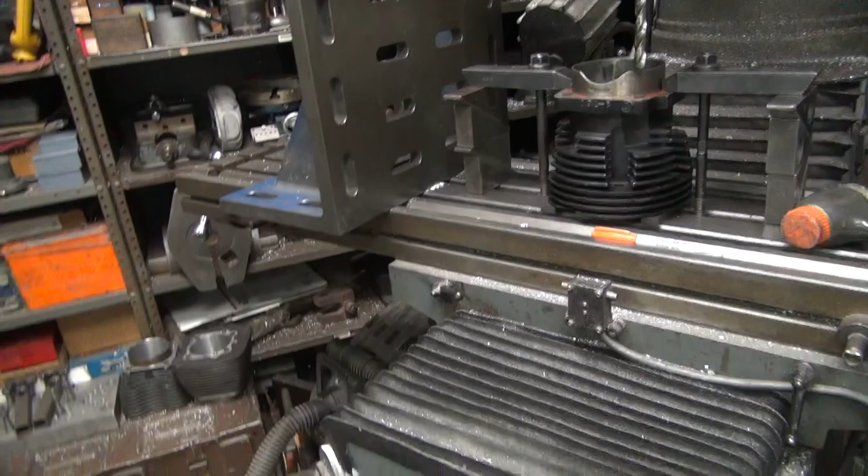Okay, back to another late night go at this again. So I stayed here last night till about 3:30 a.m. to get this cylinder kind of roughed in square. Figuring out the hole location by dropping this drill bit back and forth here like this till you find the center point and keeping track up there what we were doing.

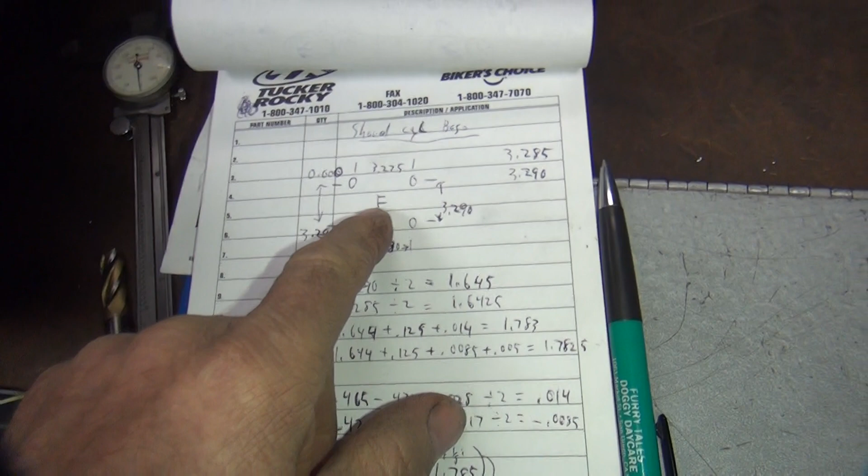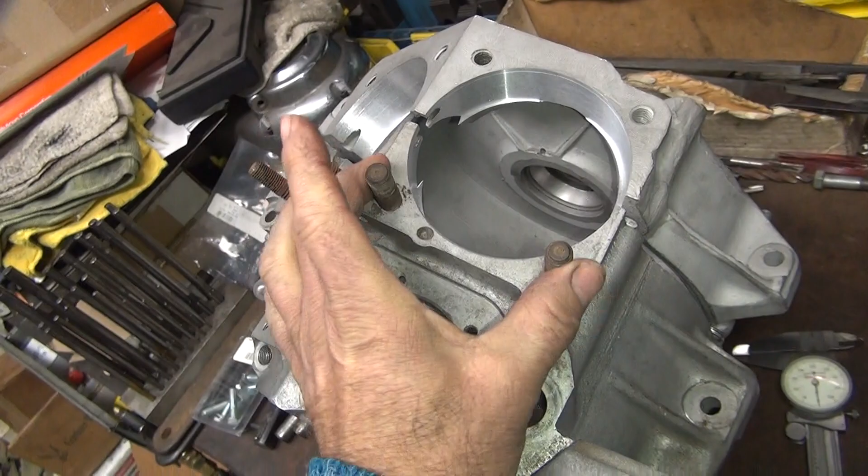So basically, I came up with the numbers here. We had 3290 going front to back, which would be the distance from these studs right here. So that'll be the center line dimension. And then the side to side dimension this way I had 3275 and 3280. So I had a variable of 5 thou that way, but it was 10 thou. We got 10 and 15 thou in their numbers.

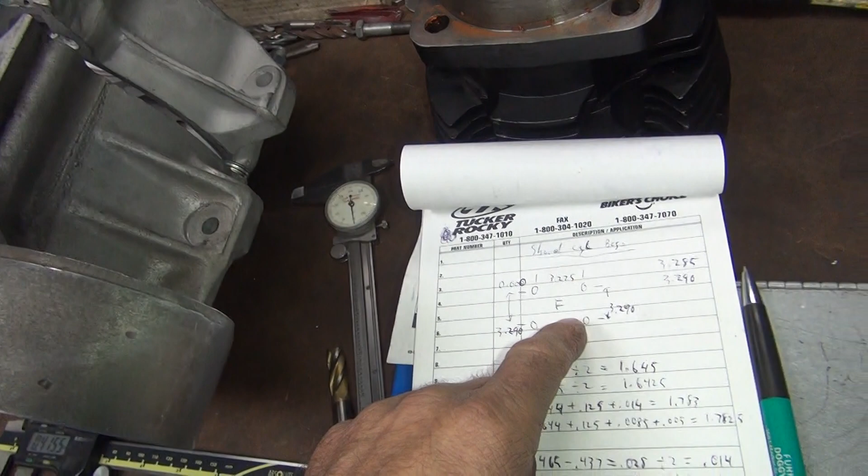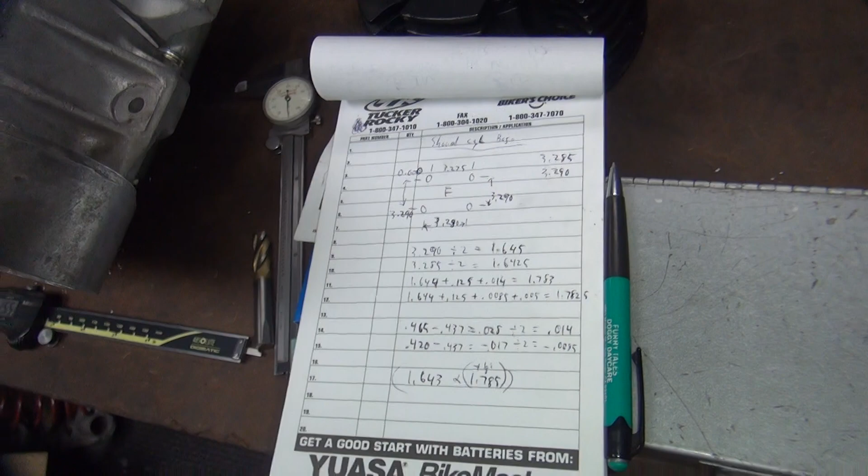So this looks like a square bolt pattern stock. You know what's on the cylinder right here, it's square. I went and measured a '61 case in back I was working on, and it's a square pattern within 5 thou. So the basic dimensions are either 3290 or 3285 is what the center lines are between this way and this way on the stock cylinder.

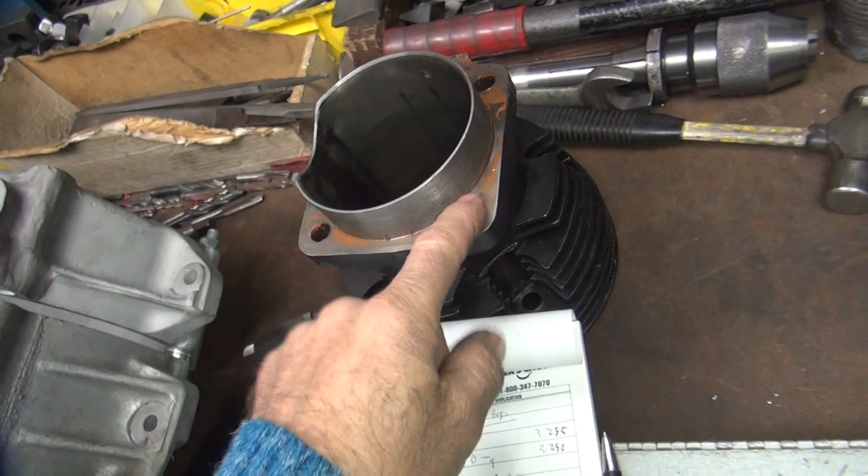That'd be both directions. So if you started here and went 3.285 that way, you'd be in the center of that hole. You went this way, you'd be in the center of that hole. You went that on both directions, you'd be on this one. So that's called dimensional figuring. You start at a common point and work to each hole. I want to add 1/8 of an inch on each side of the hole here for the spread distance this way, but stock dimension this way.

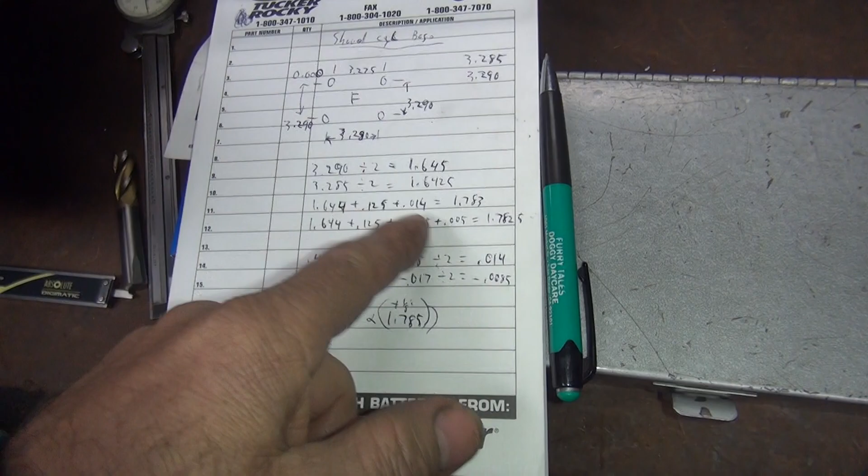The other way of calculating stuff is the center line dimensions, where you come from the center of the cylinder and you go out, and that spreads out equally. So I like that dimension better because it's easier to keep track of where you're at. When you add 1/8 inch, you get kind of confused on where you're at. So what I came up with was a bunch of calculations going by the smaller cutter size that I have here, the oversized hole here, and the standard stud size here. I worked everything all out with all the math.

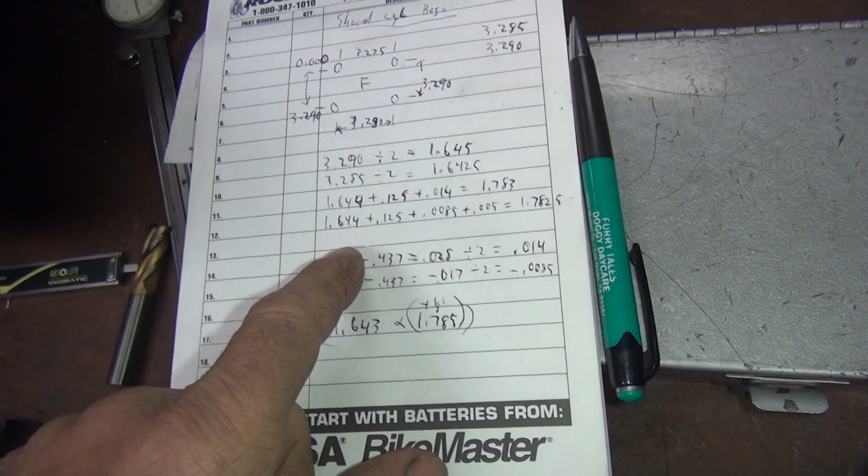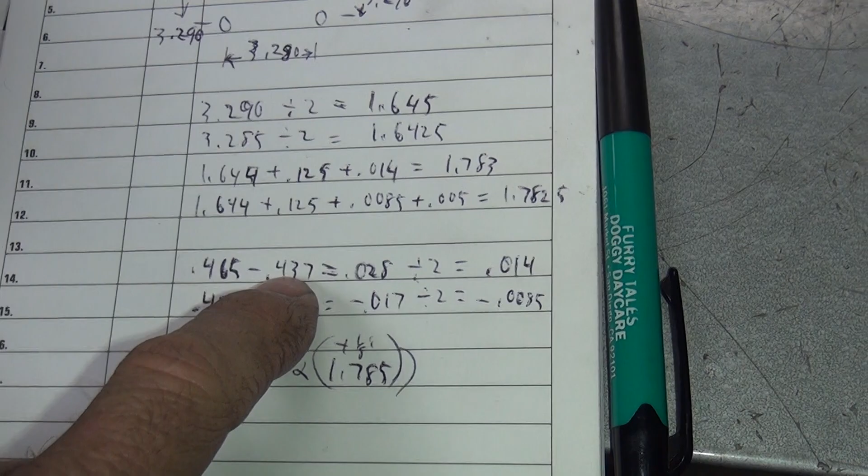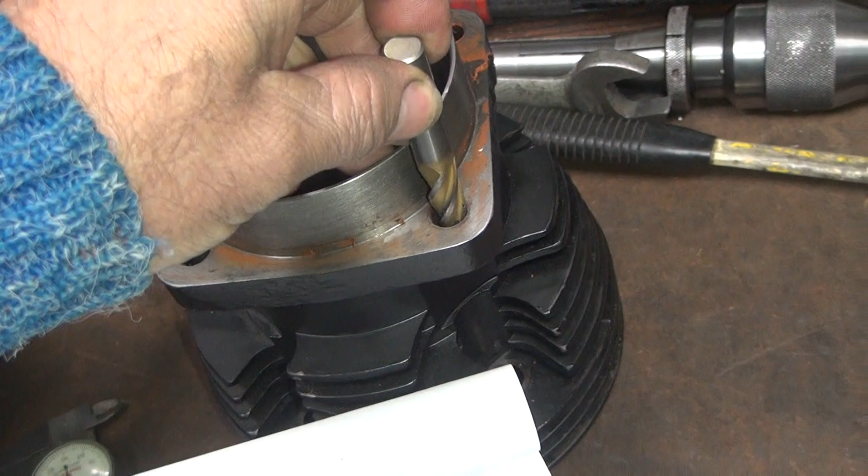So basically, if I average these two numbers out, I get 1.644 for half my center line dimensions. So that's going each way. Because you took the big number, divided it by 2, that gets you the center line. So doing that, I came up with that. The hole that was in here is pretty big. So it's 465. It should be a 7/16 stud, which is what that is. So it's 28 thou oversized. So that's a 14 thou offset to get your cutter from the center line over to the edge of the hole, because we've slotted out. So that's what that worked out to be.

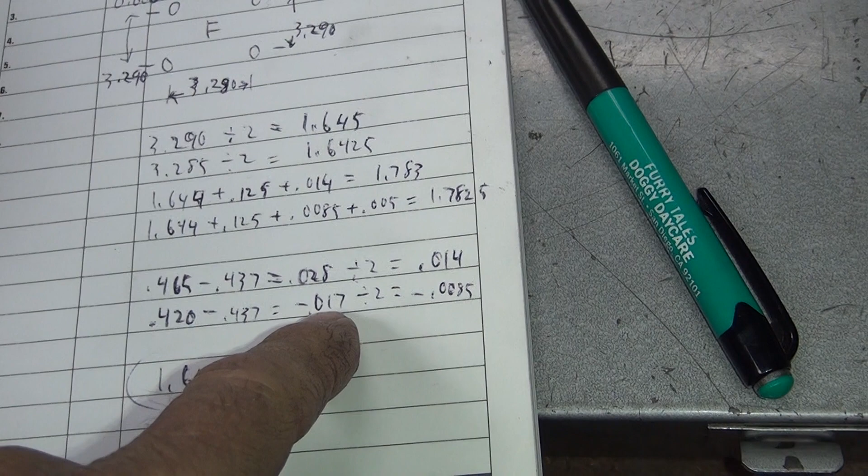Now my cutter is undersized. So it's 420 instead of being 437 in diameter. So that's a 17 thou offset, which is 8.5 on center. Smaller, so you got to add that onto the number. So if you take all those numbers, 644, 125 for half the case split here, because that's 1/8 inch from each side, 1/4 inch total. Then you have 8.5 offset for the cutter.

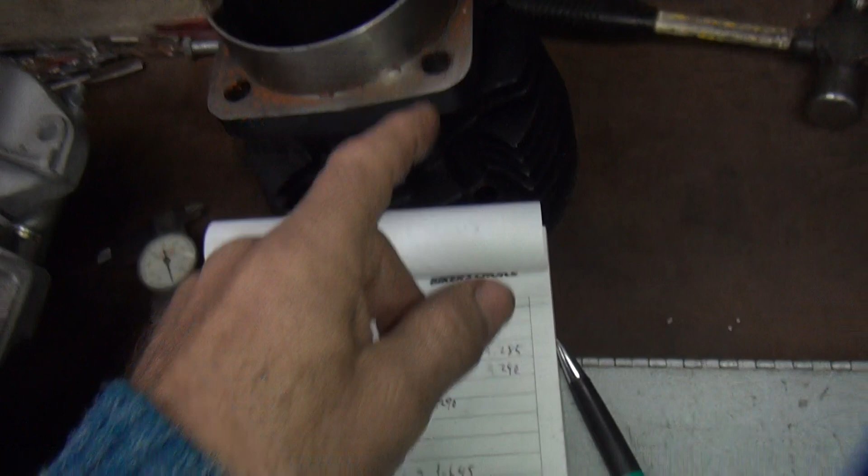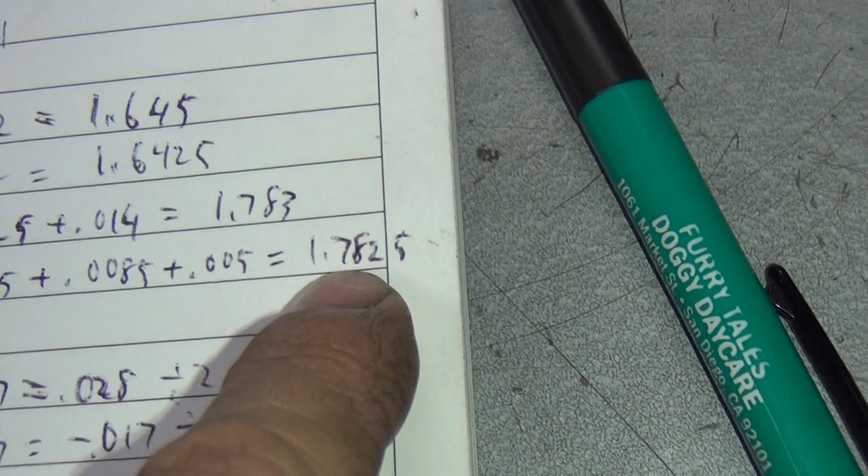And I add an extra 5 in there for clearance, because I don't think I need 30 thou slop in the damn hole. I'd rather have a little bit tighter fitting than one that goes clunk, clunk, clunk back and forth. Just a little bit of clearance is fine, but I don't want a lot. So I came up with a number of 1.782. So I'm just going to round it up to 785. And the 643 is the number that we can use, or 644, whichever one you want to use.

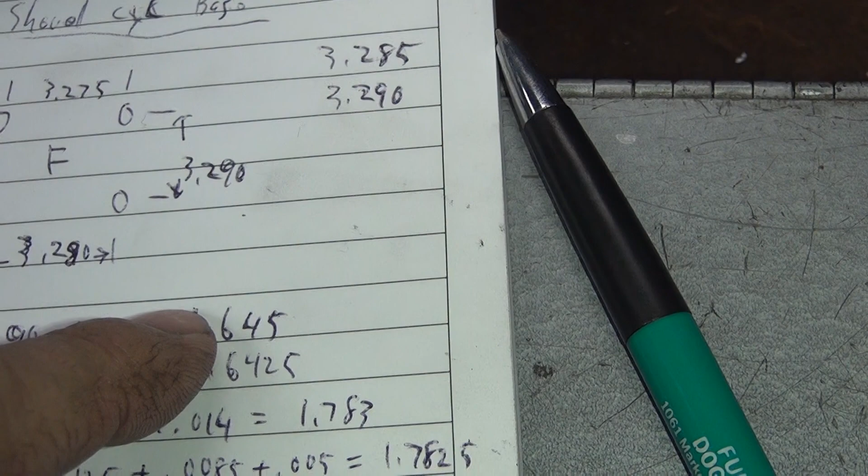So it's 42.5 to 44 to 45, I mean. So you can be anywhere in that group. We'll average out your two numbers. I'm a little bit tighter, so I'm trying to just keep things a little smaller. All right, but I can make that 44. Doesn't really matter. 1 thou ain't gonna kill us. That's 2 thou total, but whatever.

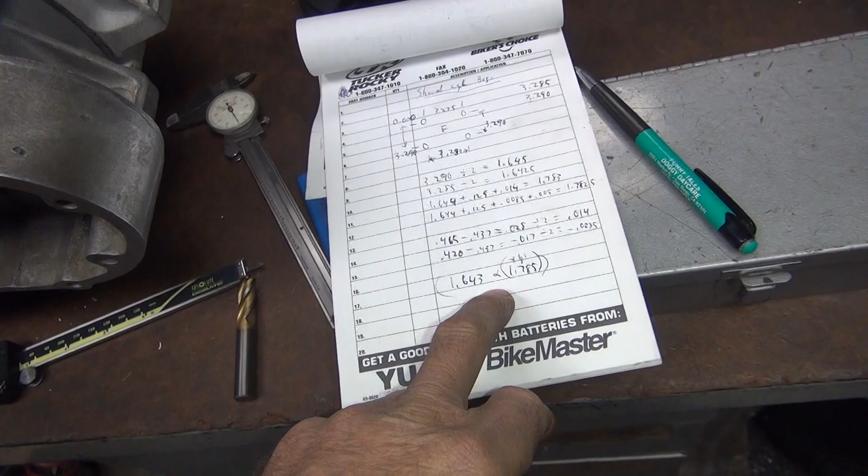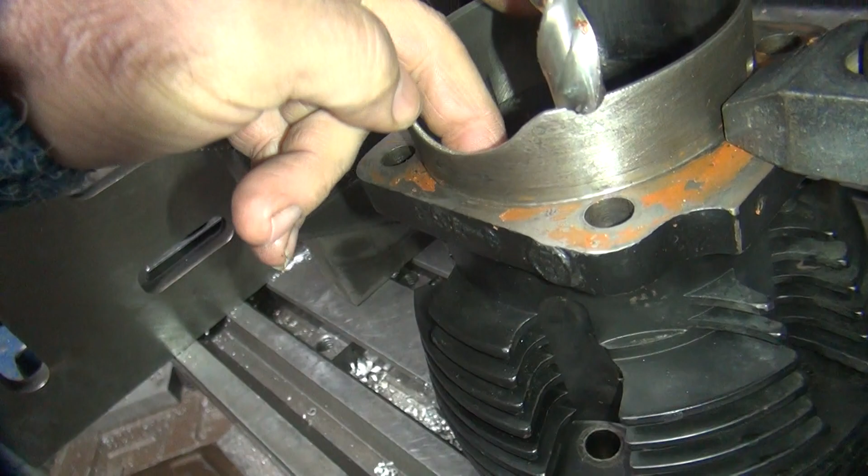So these numbers I got, those are gonna be the XY dimensions up here after I figure out what the center line of the cylinder is. Now I need to do this anyway because I need to bore out this cylinder where it's all been squeezed in right here. So I got to recut that with a mill to get that area cut out, and then I can hone it back around. So I need to get to the center of the cylinder anyway. So I'm going to use that dimensioning. There's lots of different ways of figuring stuff. That's how I'm going to do it.

If you had a CNC mill, you'd probably come off to dimensional measurement, not centerline dimensioning. Now, those might not be the right phrases, but that's the terminology I use because I know what it means to me. And that's all I really care about, so screw it.

Okay, so that comes out of the hole there. Back this over to the center. Now, theoretically, if you go 1.644 or 643, so 643.5 in the middle of those numbers. Six, 643. And then there's another half. 643, not 663, dumbass. Okay.

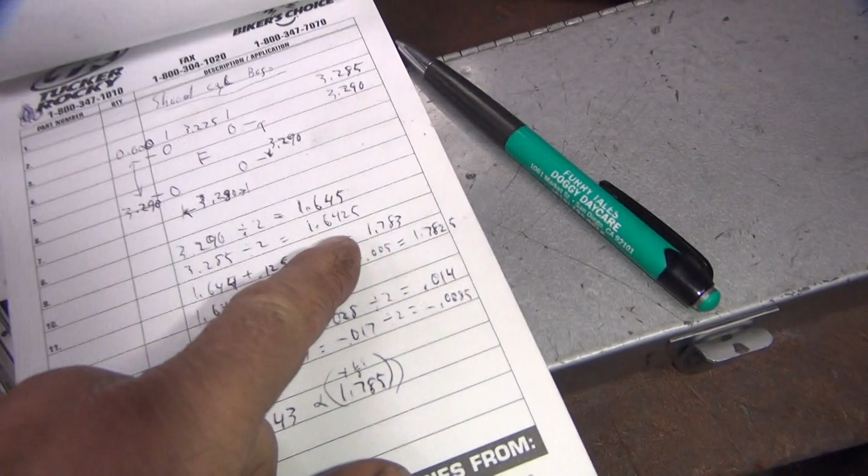So I took my dimensions that are guessing where I was at, right up there. We put my number in plus an extra half. That should give me a real average of these two numbers here. Because see, it was 642 to 645, so 643.5 should be in the middle of both those numbers. That would be called an average. Theoretically, I should be right on center now when I sweep this with my indicator. So we'll see how far off we are. If I'm within a thou or so, we're doing pretty good. If I'm more than a thou off, we're off. So let's see what we're gonna get.

I already see it's off. Okay, what do we got over that way? We're at 0 that way. Okay, we're good that way. This way, not so good. I was off in some dimension. Let's see, that's about 10, about 11 thou off. So you split that in half to get where we want to be. Of course, we got wear in the cylinder, doesn't help matters any. Go further down might help the situation a little bit. And that changes a bunch. One extreme to the other. 0, not quite 0.

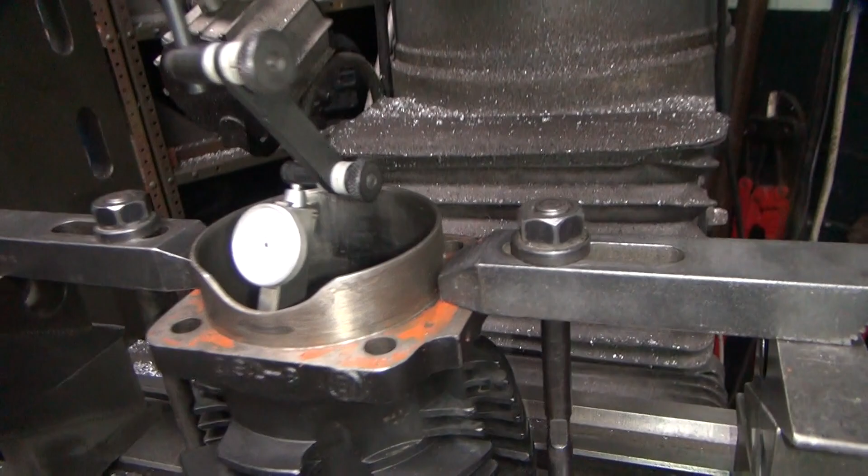Alright, cylinder's out of round, so we're not getting a perfectly centered up hole, but we're within a half a thou. So when you sweep it around, we're staying pretty even now. So there you go. So I can live with that.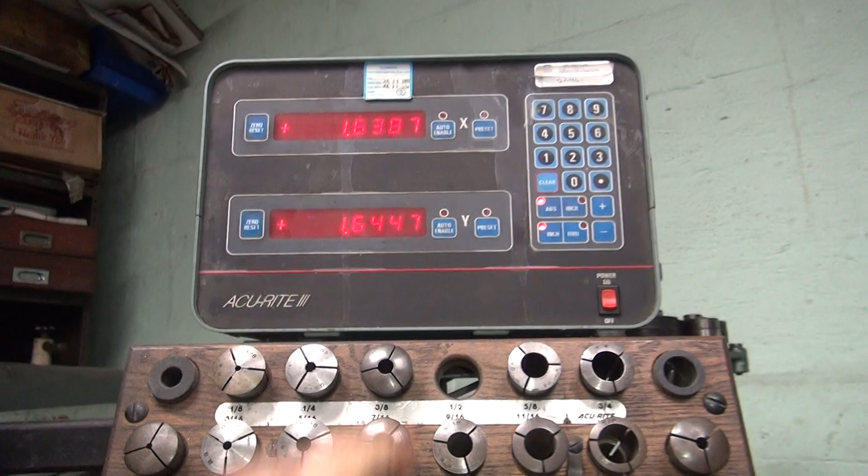Okay, so we wound up being 6447, which is on our number we wanted, and that one we're off by quite a bit. That's 6 thousandths off, which is our 11 off, 12 off. So I'm assuming that's because I had this 275 number and we got 290 over here. That's 15 thou difference, and we're showing 11 thou up here, so we're within that tolerance range. So that means my hole numbers are probably pretty close, but like I said, we're coming off of someone else's deal. Anyway, right now I'm going to go ahead and zero this thing out because I am on center now. Boom, boom.

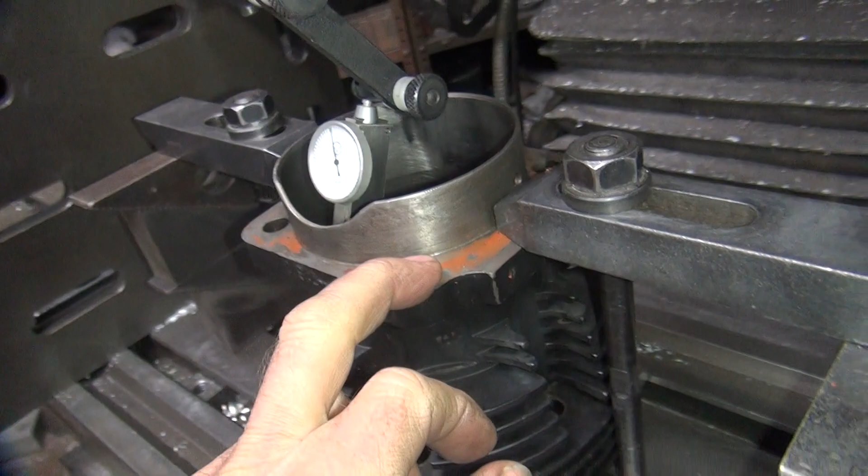So now I can go ahead and bore this thing on center to clean that up, and I can go ahead and move this off center and cut the holes bigger. So at least I got something to go by now. A lot of work for setup, and only takes a few minutes to do the cutting. That's normal. When I do the next one, I get to do the same thing all over again. Oh boy.

Okay, so now, take the indicator out. Let's see how close we were here. We got 2 thou of difference here, so the cylinder's probably not quite flat either, I'm guessing. Let's see, we are losing 2 thou. Go in this direction. Staying pretty straight on that side. Same on that.

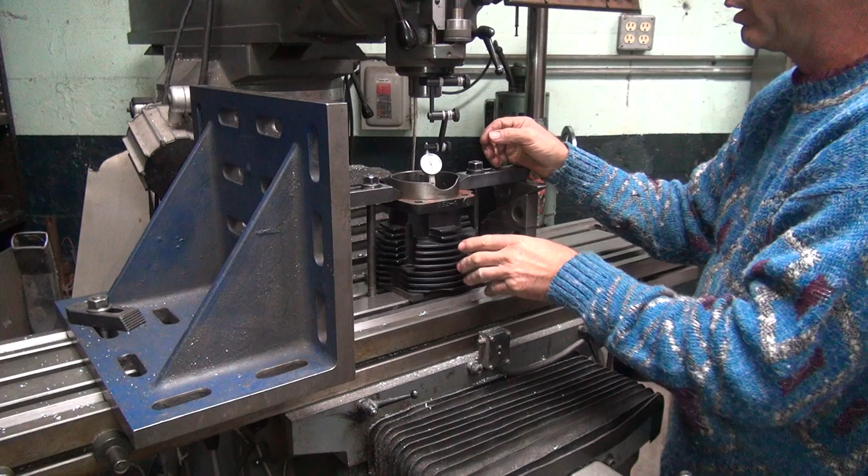So only this side has got a taper in it, and why has it got a taper in it? Because someone beat the hell out of it right here on the side, and it warped the whole cylinder on that side. Plus that is where it wears. That's the wearing point. It's the thrust side. So there's a lot of wear in this cylinder. What a shocker. Beat up race parts are not square. That is really hard to believe.

Okay. Alright, so I'm going to take my end mill. Try to leave out enough distance I can use it.

A little bit of wobble, but not too bad. Okay, so now we need to go figure out what direction we're going to go here. Okay, we are going to go this direction wider, stock this direction. So that means this one here we go to our 1643, 640, whoop, or 44, whatever you want to call it. Split the difference. 38. 643 and 8/10. That's pretty close.

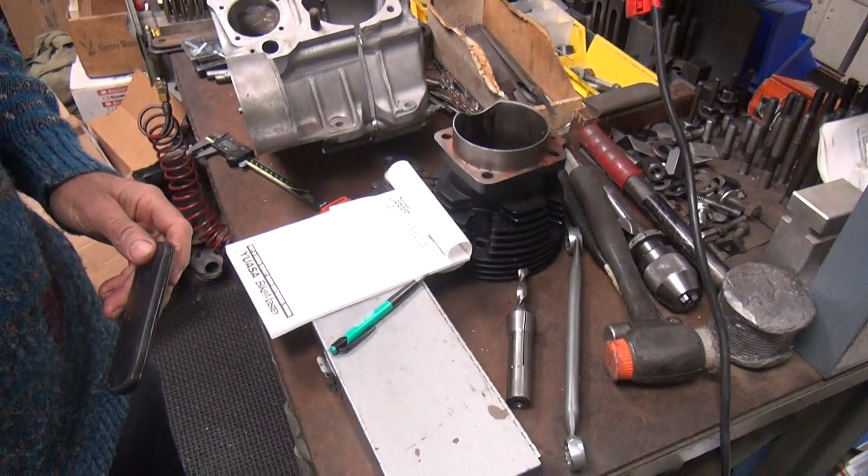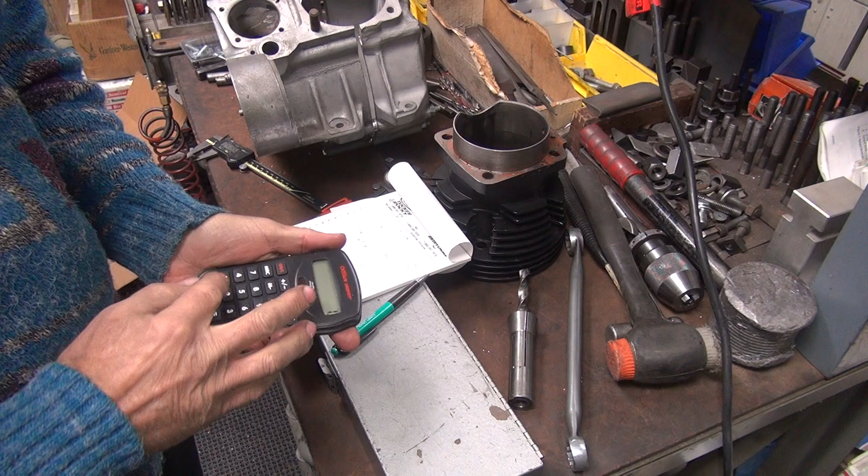Okay, now if I go this way, we have my calculator here. I gotta do a little test. So we're going to be adding 8.5 thou to our 14 thou here to our number there. So 1.644 plus 0.014 plus 0.09 equals 748, should be the edge of the hole.

Let's find out. 1.748. That doesn't make sense. That doesn't make sense at all. This number's too big. 0.748. No, that's not right. Right there we hit 668. I'm 100 off on something. So where did I come up with my error? Somewhere I got an error in there. Probably gonna be half the cutter. I'm doing something wrong with half the cutter probably.

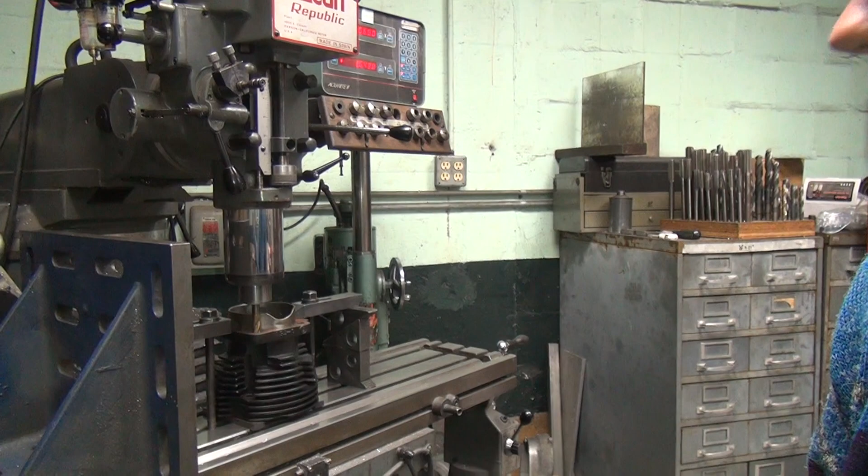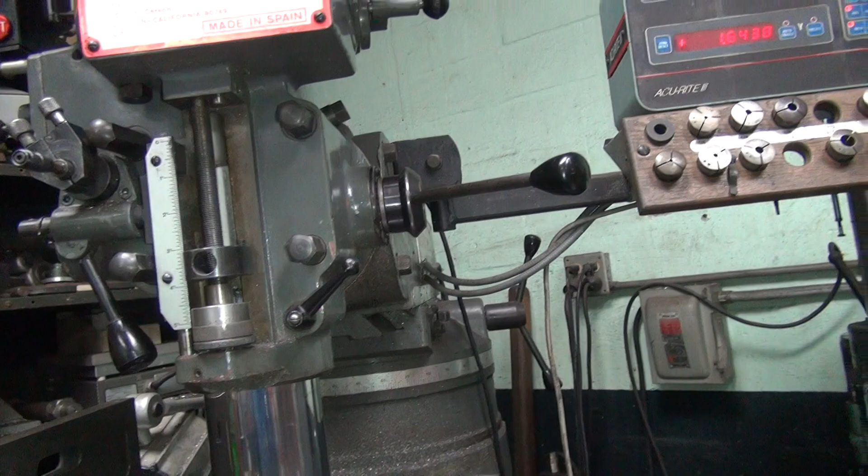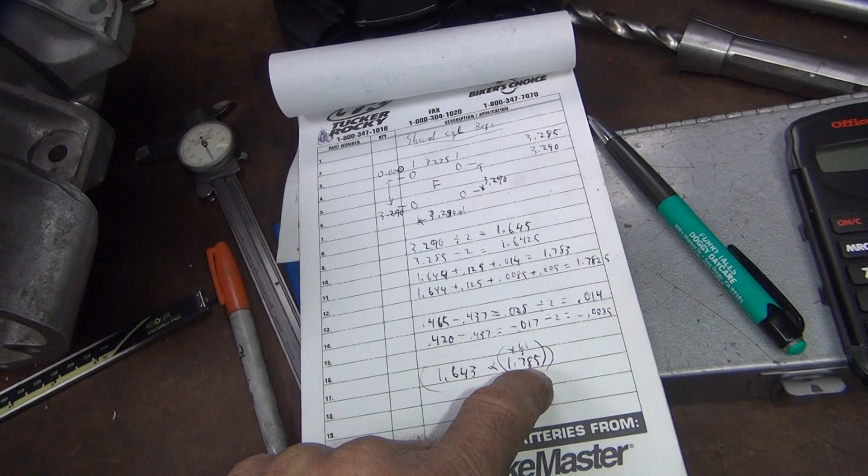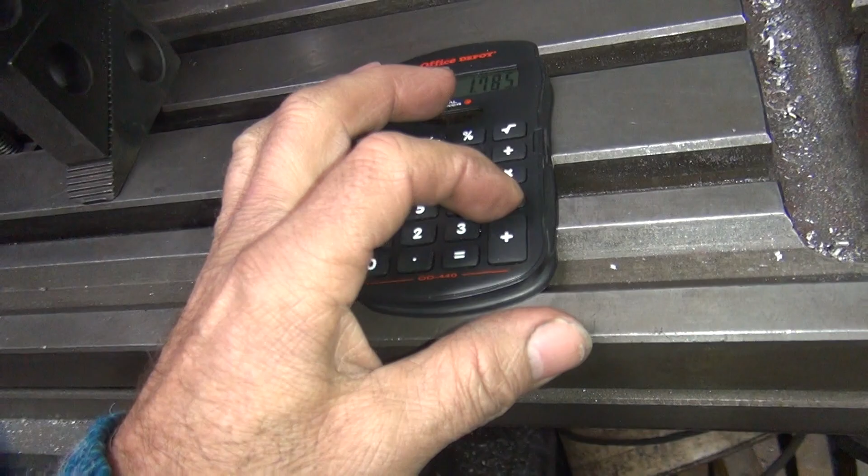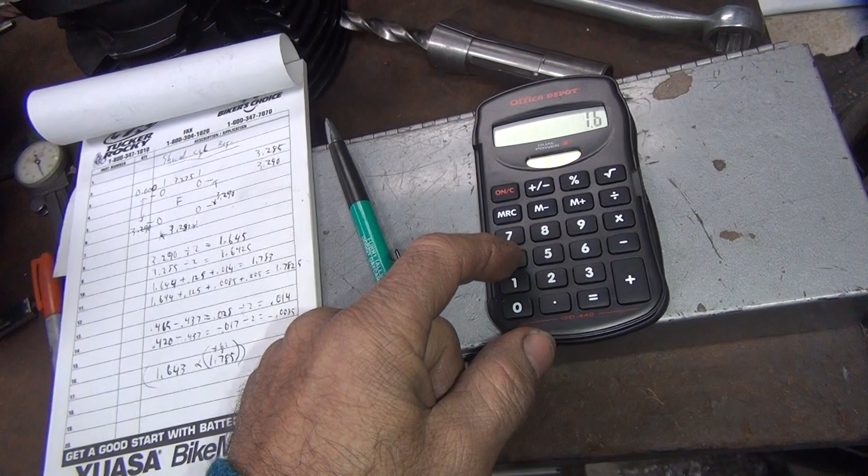So if we take our 1.785, that's the number we had right there, we minus the 643 number, 1.6, oh damn it, closer, 1.785 minus 1.6435 equals 141 and a half, 141.5. How am I coming up with these numbers? See what tired does for you? What the hell is that number?

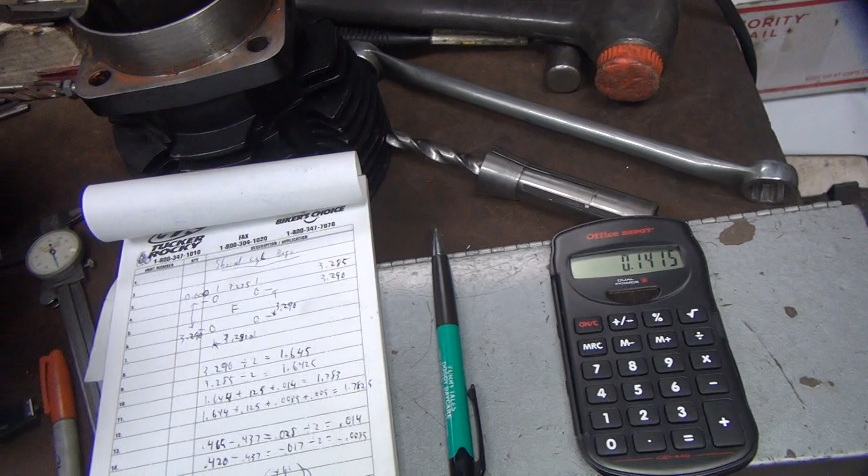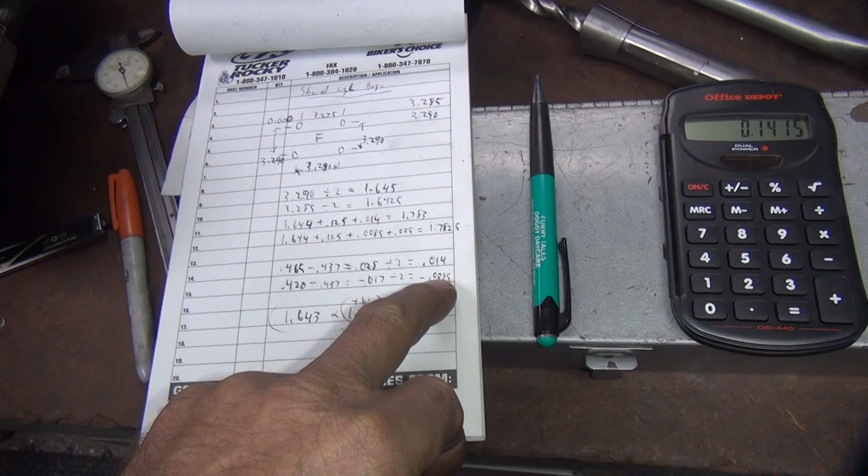That'd be 283. You double it. I don't know what that number is. Oh, the offset's the 1/8 of an inch. 125, but that's still too big for that. I have no idea what that is. So much for math helping me, right? Okay, well we know it's 668. I'm gonna go check this and see if it's 668. Somebody can go through all the dimensions and figure out where my error is at, because there's an error in there someplace. I don't know what it is.

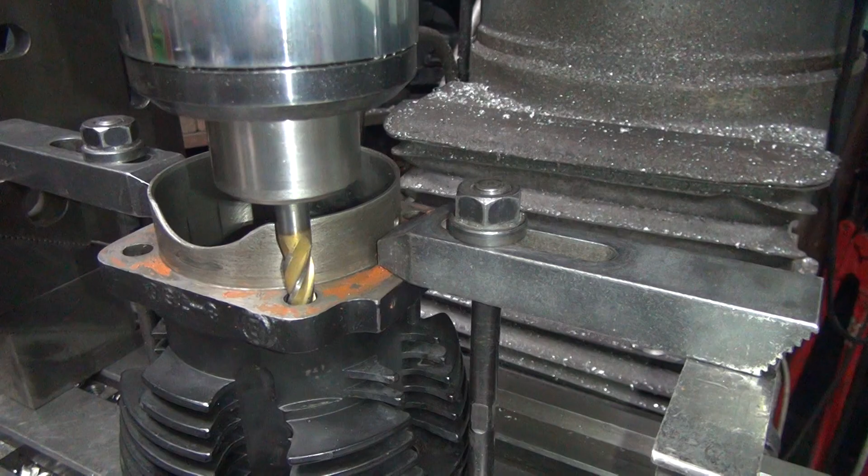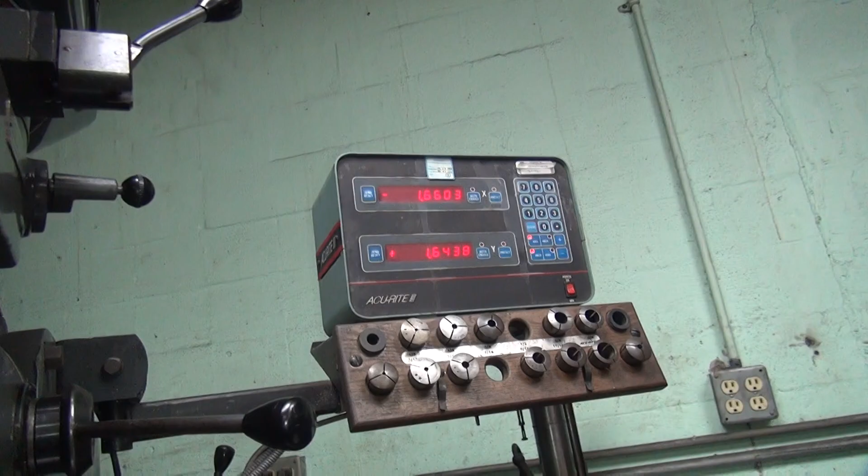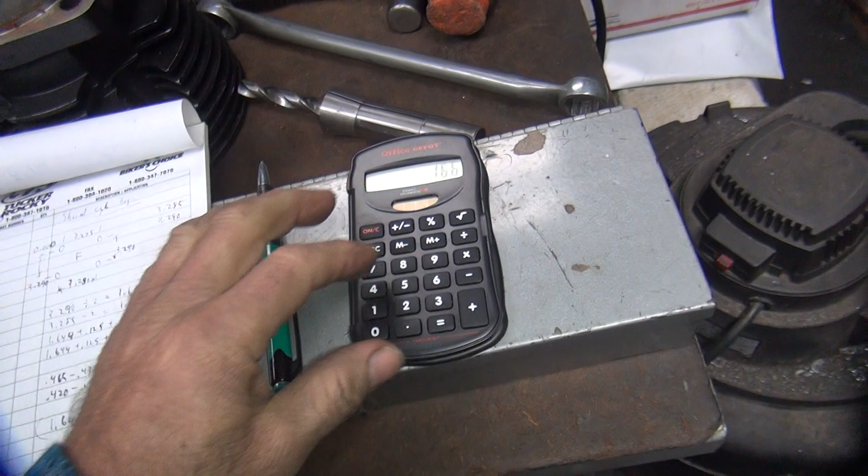Okay, all I know is we're going to hit this one pretty quick. 654. 660. We hit. Alright, so 660 we're hitting, the other one was 668. So the hole is off slightly, but see this is a manufactured part, there's error and stuff. So there's a 4 thou offset and error issue difference than what it should be. Alright, so if you take the 1.660, times 2 equals 3.32.

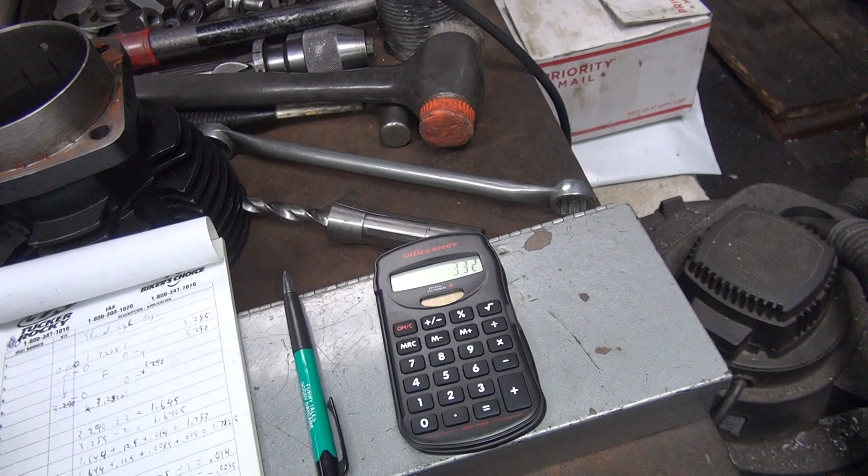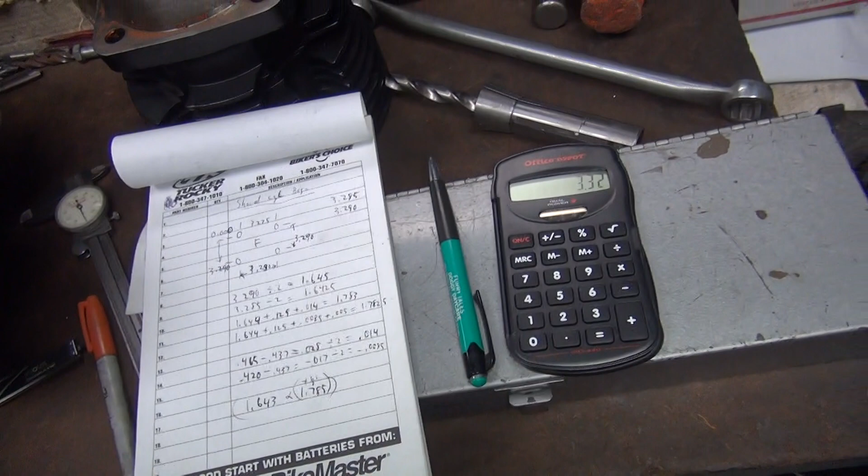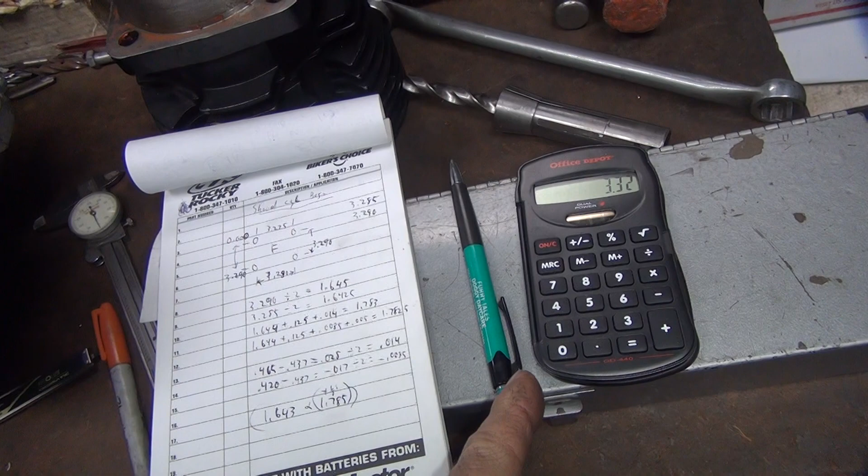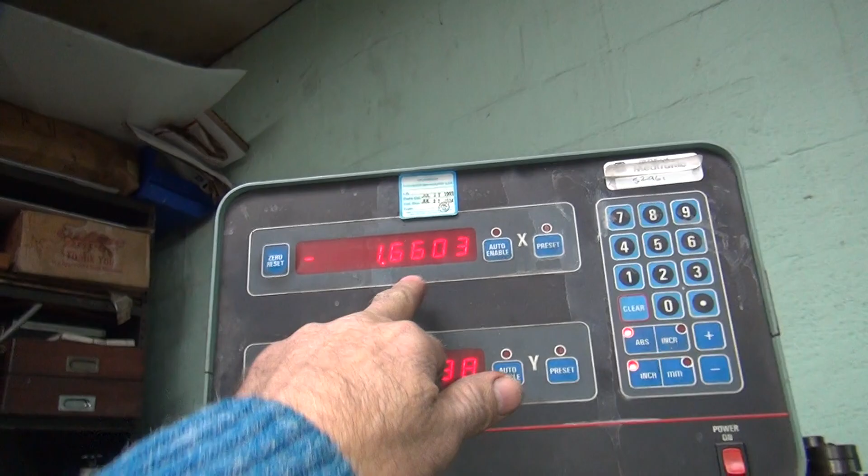The numbers aren't coming in where, they're not working in my head. I should be able to back figure this and know what the hell I'm doing, but I'm not, something's not right. I'm screwing up something. So the diameter of the cutter is different here. There's an offset change of 8 thou, which you would have to subtract off of this number. Yeah, it doesn't matter. Here's the number I care about, right there. We're going to take 1.660. Screw all the math, I don't care.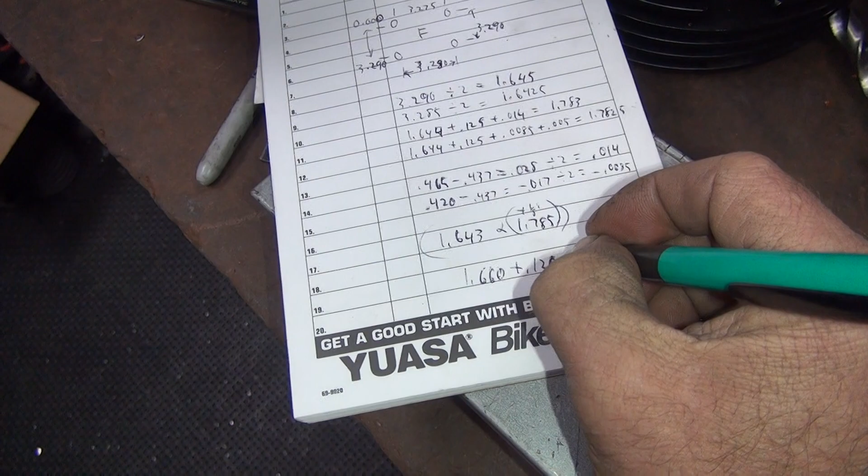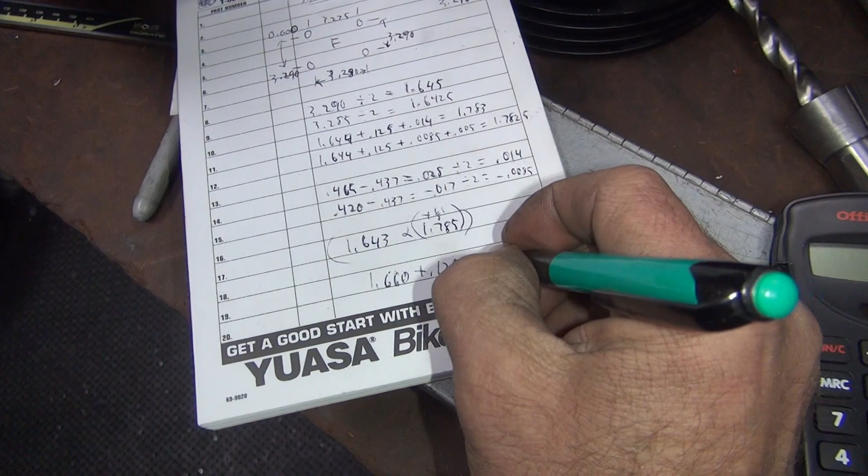1.660. Pen doesn't work very well. We add in a 0.125 to this number. Actually, I'm going to say 5. I don't want to go too far. Well, we already had 8, 5. Yeah, who knows? We'll figure it out. That's going to equal 1.660 plus 0.12 equals 1.780. 780. That's my offset number we're going to use.

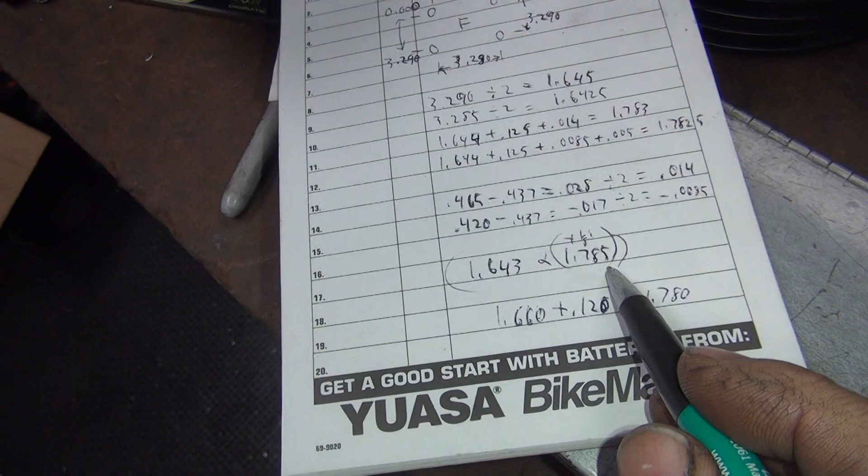And there it is right there, 1.785. So what the hell? It came back to my number. I don't understand. Yeah, whatever, screw it. It doesn't matter. Okay, so somewhere between 780 and 785 is the number I'm shooting for up there.